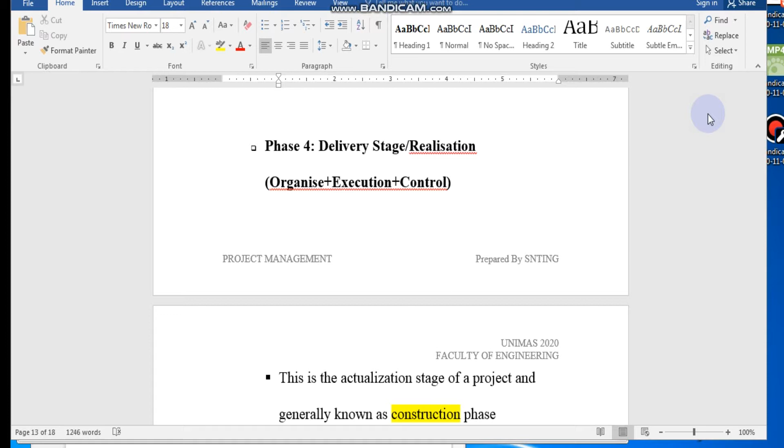Next phase of the project is obviously very interesting because it deals with the realization of the project, it deals with the delivery of the project, it deals with construction of the project. So basically, in the construction stage of the project, we are looking at two phases.

One is tendering, where you're looking for procurement, looking for the contractor to build things for you, and this is what we call the procurement stage. This procurement stage will involve preparation of final documents, which we've done earlier on, followed by calling for tender, deciding who will come and what are the criteria for assessing the tender, and who is qualified to actually tender for the job.

And it doesn't necessarily have to be tender, it can actually be a quotation. By a quotation mode, you can ask 10 guys to quote you, and check out what they offer. Or you can go by tender, which means they fill up the information you want, propose a price, and you pick the best contractor to do the job. We call this procurement.

Procurement stage of the project, we will explain that in more detail in week 9, 10.

There's many modes of procurement. You can go for design and build, or traditional general contracting, but it's about how you get the services of the contractor to complete the work for you. That is procurement. So tender is a very big part of procurement.

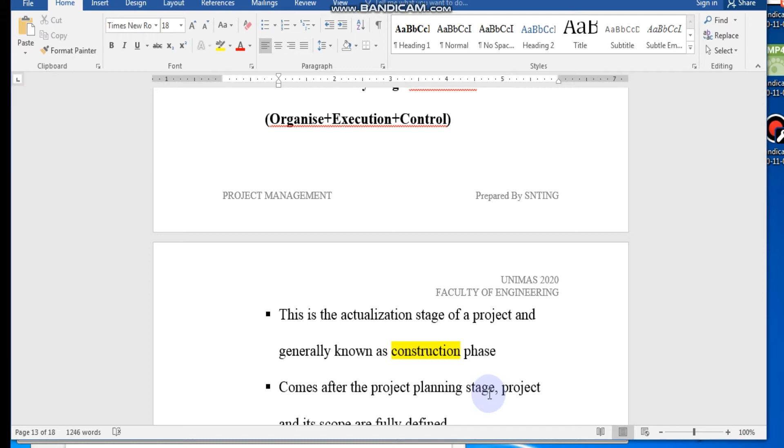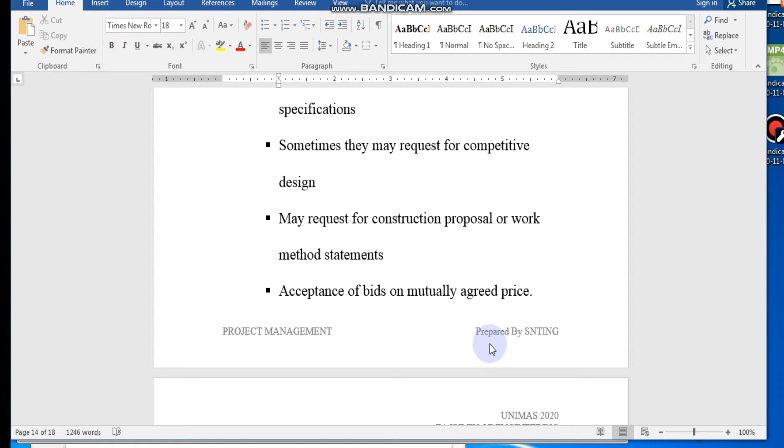Once you pick your contractor after the bidding stage, you agree on a mutually agreeable price. The contractor offers, you accept the offer as a client, then you both sign the contract, and the job is awarded to the particular contractor. Then the contractor will move in and start the job.

Once this bidding stage is complete, contract documents are read and signed, and the contractor will have possession of the site. They will start to take over the site, work will commence, and they will bring in labor, machinery, equipment, and materials, and minor procurement will also be done.

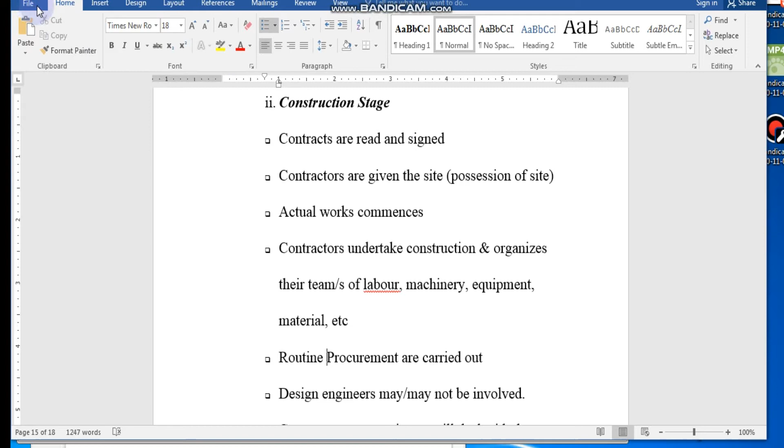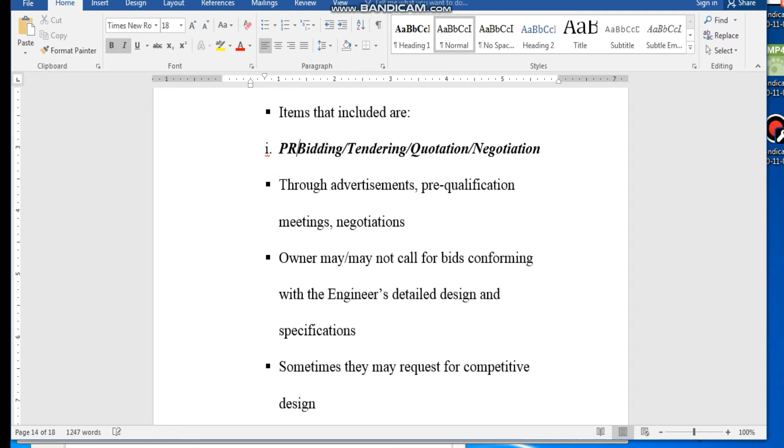I would say that this is routine procurement, which is actually pretty much different from the general idea of procurement. All this tendering we discussed is what we call the procurement stage of a project. So it sounds the same, but it's actually two different things. I need to be clear about this, otherwise you get confused with the word procurement.

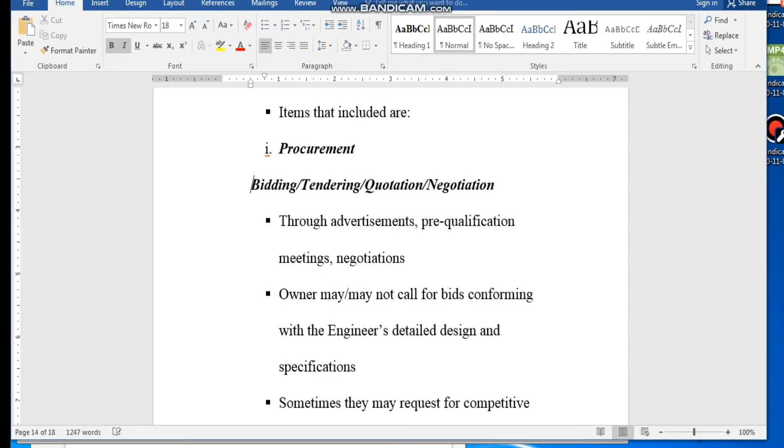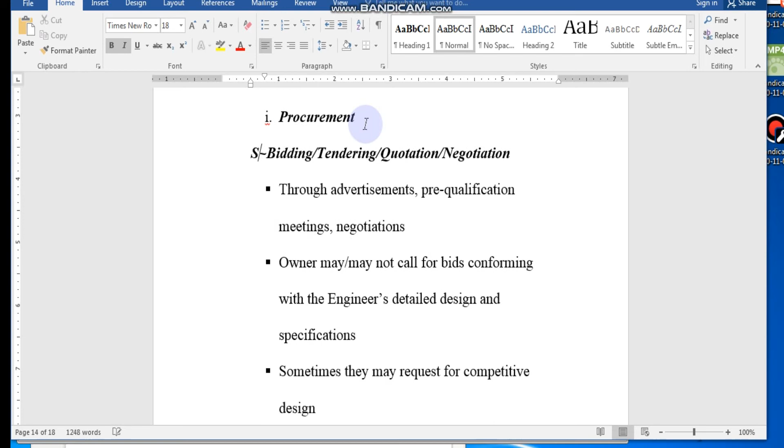So one of these is called the procurement stage, another is called the construction stage, and they all belong to the realization stage of a project.

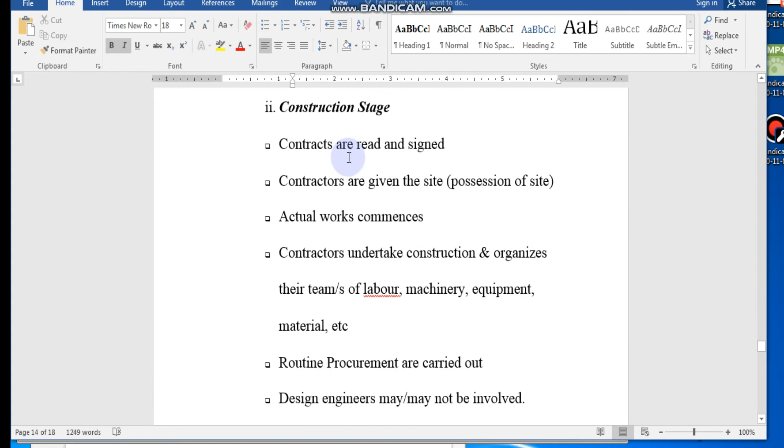In the construction stage, activities are just really ongoing. There's so many things going together. Routine procurements are done, site supervisions are carried out, site daily records are done, rainfall records are recorded, machinery lists are coming in and out, and there are site daily meetings and site coordination meetings. There's a lot going on in this stage of the project.

In terms of project life cycle, this part is what all engineers look forward to, and this part is the most stressful, with the most activities. There's a lot of intensity going on here at the construction stage of the project.

If you look at intensity of the project, this will be the highest intensity, followed by the design stage. The whole entire initial stage of the project will only probably take up about 10 or 20% of your time, followed by design at about 30%, and this will be at least 40% to 50% of your time in a project life cycle spent on construction, usually over years, sometimes 18 months, 24 months, etc.

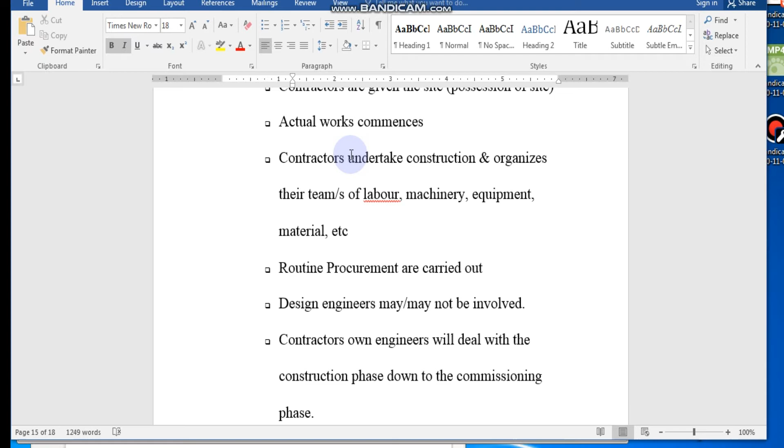Once the project is finished, you hand over to your client, and this is the part where the project is officially passed back to the client.

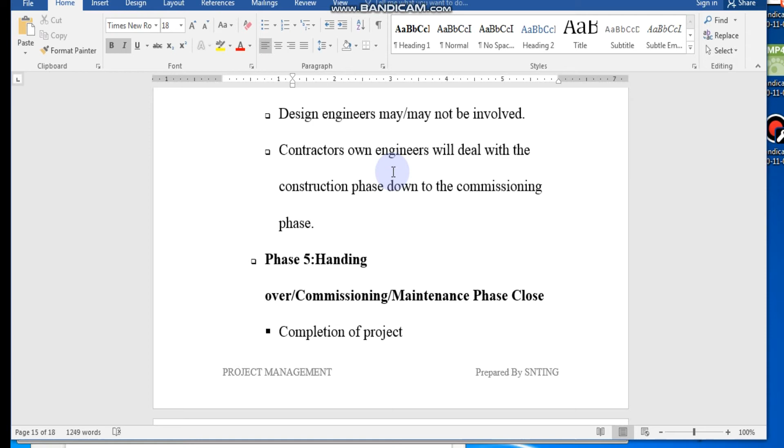So that land that the contractor possessed on site, you put in your facilities, and from there you hand it back to the client, and we start the official commissioning. Commissioning means the project is running, the facilities are running, the pump is pumping, the water is flowing, the road is open for public use, and everything is fit for its intended purpose.

The facilities will be totally in operation at this particular stage of the project. This phase 5 is about commissioning, handing over, and then finally, after a year of defect liability period, we will close up the project.

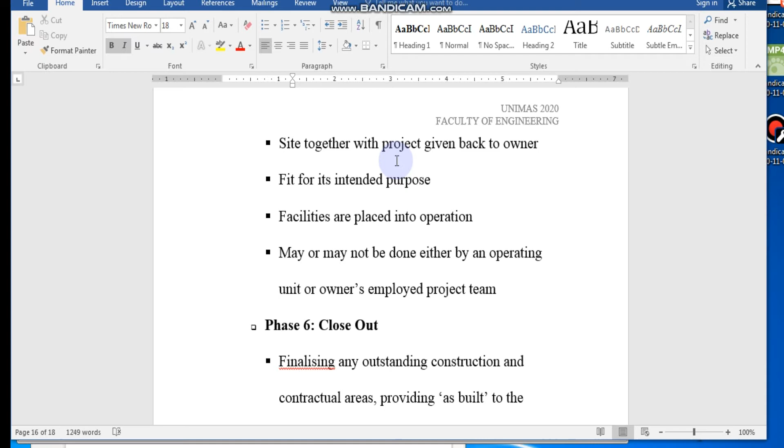As-built drawings are prepared. As-built basically means the design is one drawing, but later when it's being built there may be changes. With all the changes to the original design, we have the as-built drawings, which are kept on record and sent to BOMBA and the various departments necessary, so they can be archived.

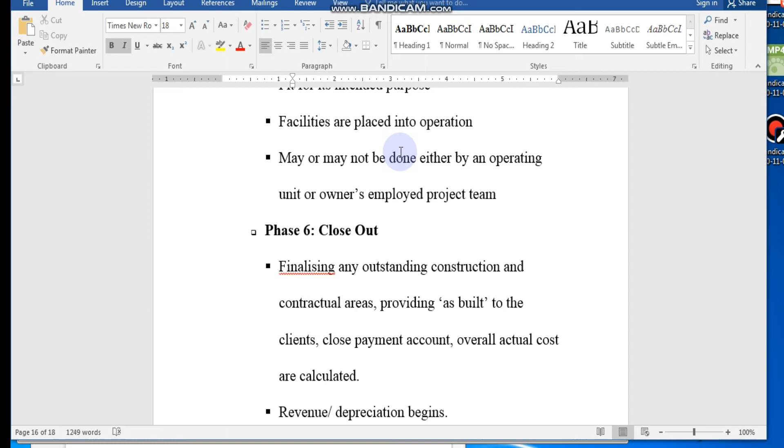This is whereby you will receive payment for the job. The final payment from the owner will also be paid to the contractors and the consultant. The client will start making money, and revenue will begin. All these things are ongoing at the same time.

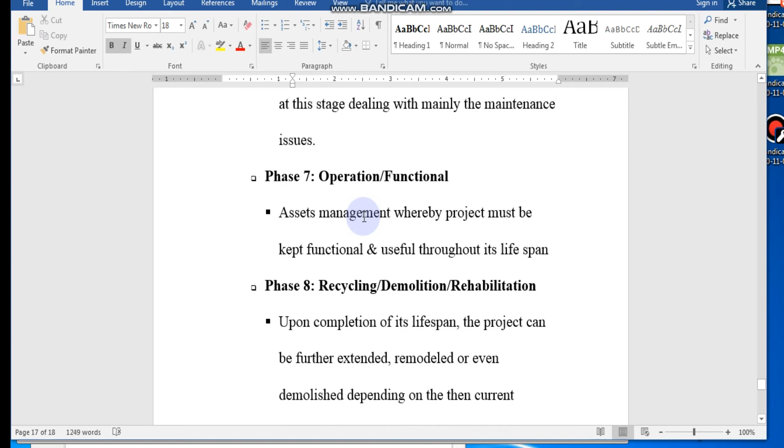Once operation is in place for a certain period over the life cycle, you will probably close the project, meaning it is finished and the lifespan is over already.

It's like going through old age, and at this stage you'll be thinking, should we continue to use this particular bridge, or continue to stay in this house, or do we want to renovate it, remodel it, do future extension, or sell it? There's a lot of things in phase 8 whereby the project changes its look and nature, so it's not what it was originally meant to be anymore.

So we will talk about demolition. There's a possibility of demolition as well, meaning you put a bomb in and bomb off the whole building. There is demolition engineering going on too - you take down the whole bridge, and then rebuild it.

So these are the 8 phases that every project goes through. This is like a human being going from birth to being a baby, from baby to toddler, toddler to child to teenager, teenager to young adult, then adult, then old folks, and finally death. Unfortunately, a project will also go through the same 7-8 phases as a human being, to come to the end of the life cycle. So that basically wraps up our whole project life cycle.

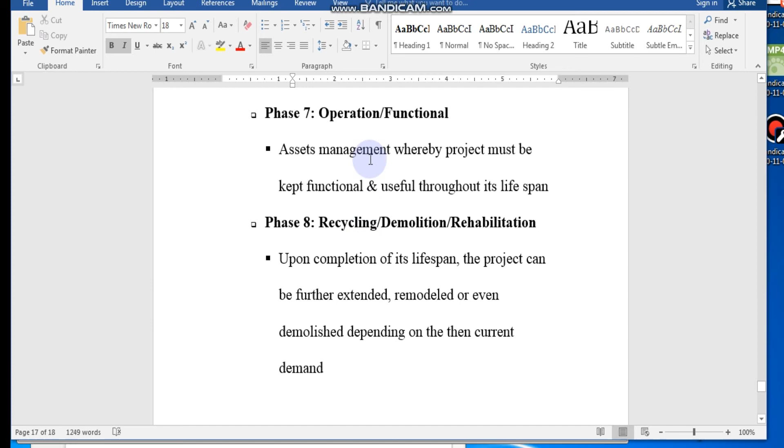The other thing you need to take note of is the intensity of activities. My suggestion is not only to know these 8 phases, but to know what is going on in each of them, to be very clear about what is happening.

These activities in the 8 phases have an intensity that goes from the lower end, like a curve - needs and ideas start at that 0 point, then conceptual design goes up in a gentle slope, then it gets steeper especially in the planning stage, then really high and lasting a long time in the construction stage, coming down slowly in operation, and finally back down to 0 in the recycling stage. So these are the intensity of activities in the project.

Sometimes you can be asked questions like, can you explain the intensity of activities in the 8 phases of the project life cycle? These are quite common questions you'll get in part 1, like question 1 of the exam or test, so take note - it's being recorded here in the lecture.

I'm giving you tips already, so take note of what activities are ongoing - you should be able to name at least 5 things going on in each phase, and know how to draw that particular curve and graph from the low end back to the top end, and coming down again, split into 8 phases, with the curve going up gently first, then sloping higher, then really high.